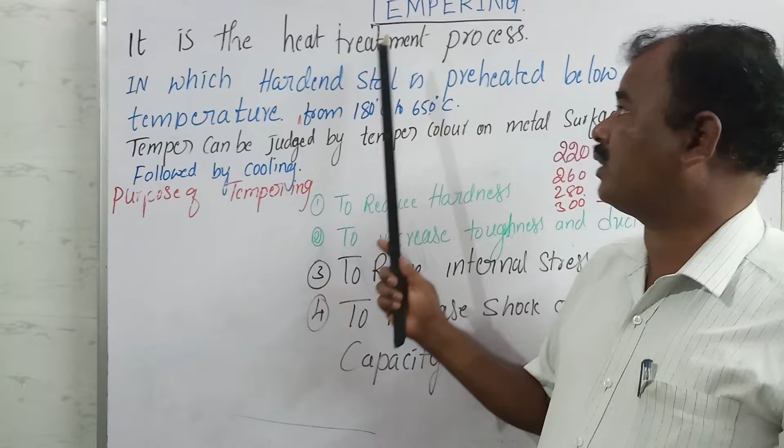Okay, next we will discuss about the third process, called tempering. We have already discussed annealing and hardening. Now the third heat treatment process is tempering. It is the heat treatment process.

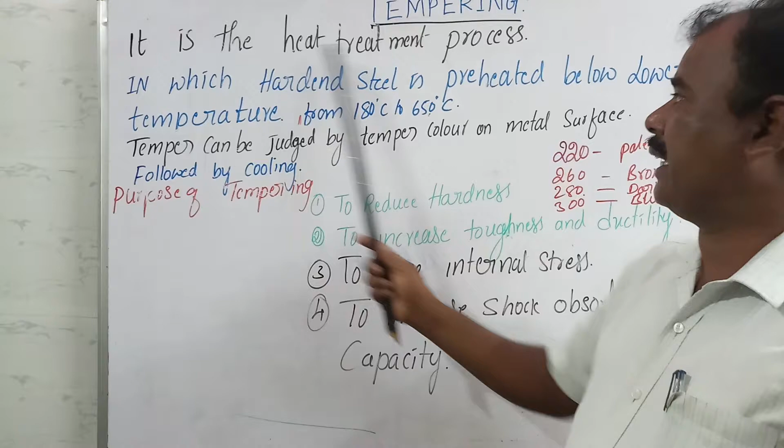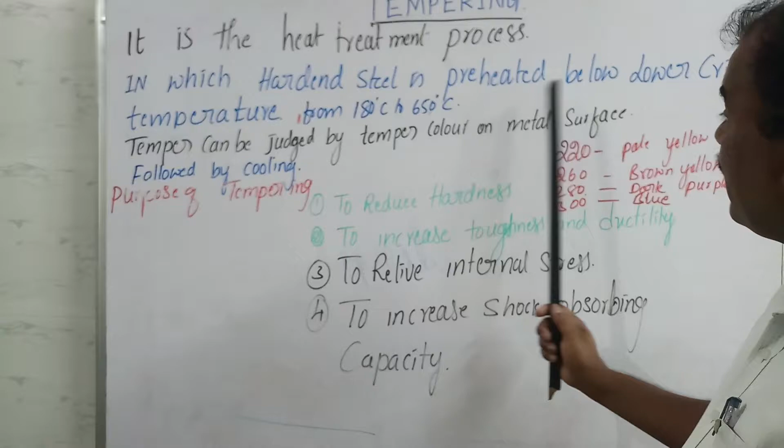What is tempering? It is the heat treatment process in which hardened steel is preheated below the lower critical temperature, from 180 to 650 degrees centigrade. This is most important. So tempering is the heat treatment process in which hardened steel, not raw steel, already hardened steel...

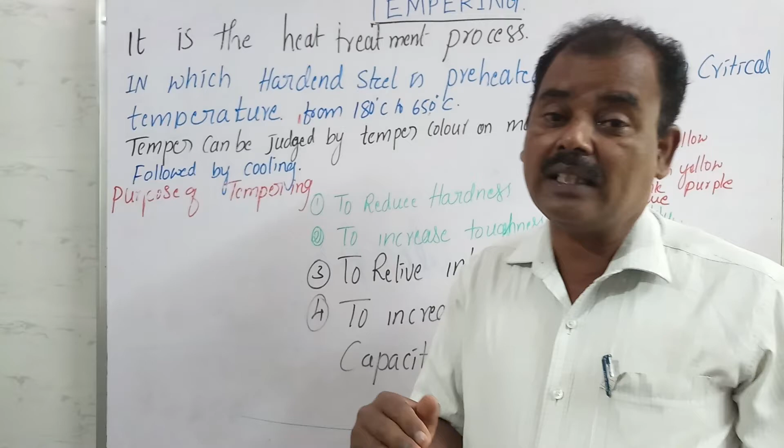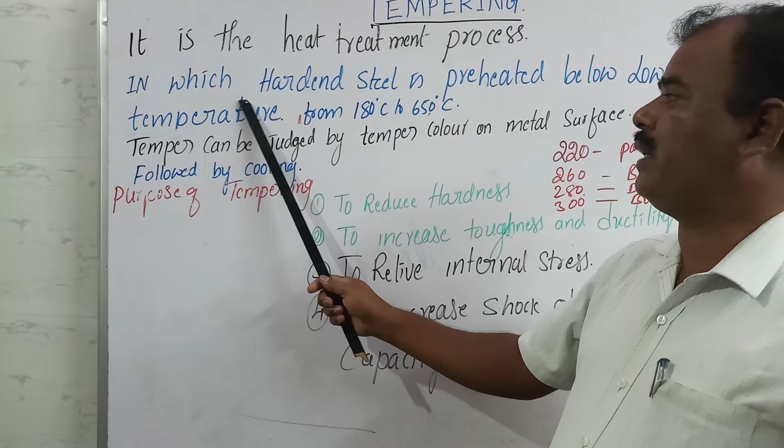It is the heat treatment process in which the hardened steel is preheated. So hardened steel is again preheated below the lower critical temperature.

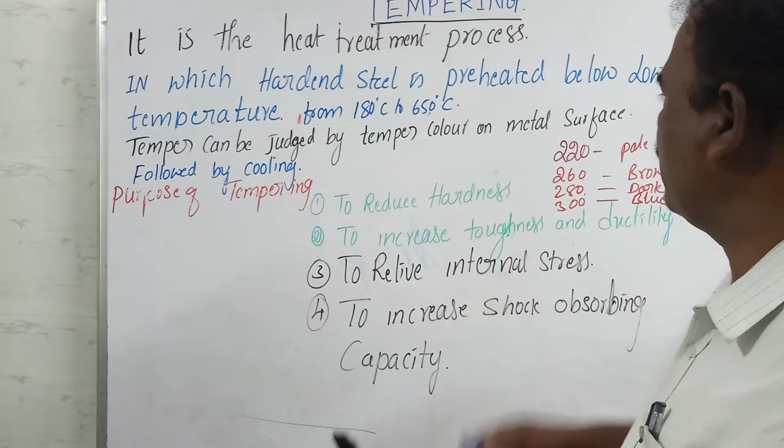What is the lower critical temperature? You already know that it is 723 degrees centigrade, the lower critical temperature of the steel.

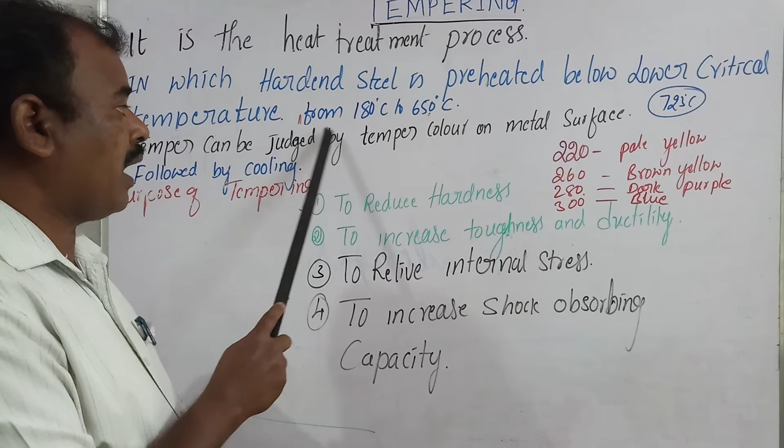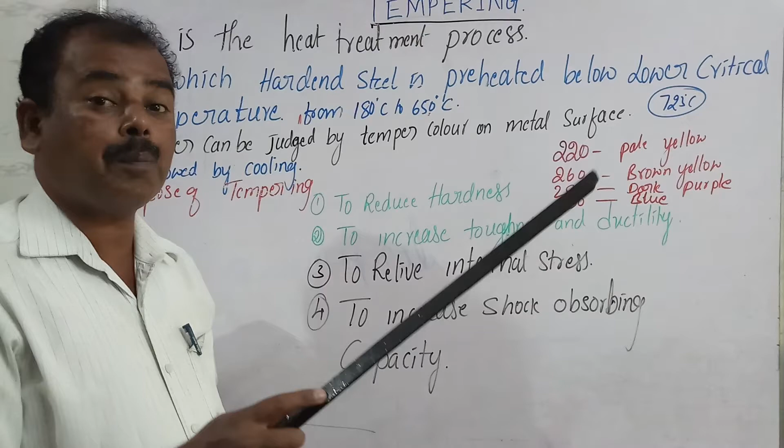The hardened steel is preheated below the lower critical temperature, from 180 to 650 degrees. Though the lower critical temperature is 723 degrees centigrade, you can heat the steel from 180 to 650 degrees centigrade depending on what property you require and the hardness of the hardened steel.

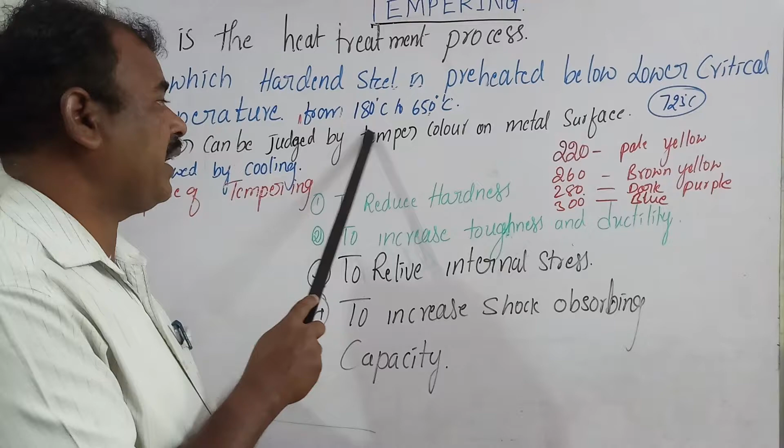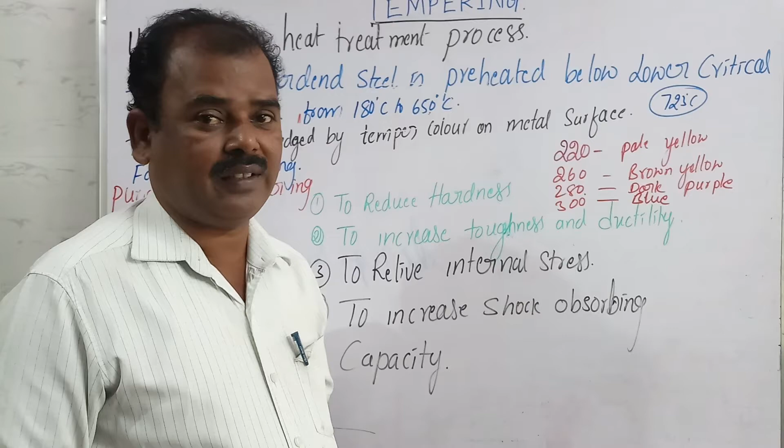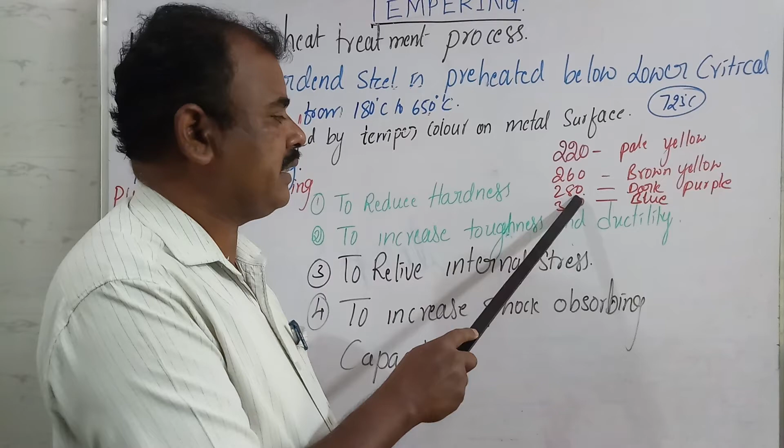For example, at 220 degrees centigrade you are heating, you get a pale yellow color on the hardened steel. At 260 degrees centigrade, that pale yellow becomes brown yellow in color. Further heating to 280 degrees centigrade, that becomes dark purple color. And at 300 degrees centigrade, you get the blue color.

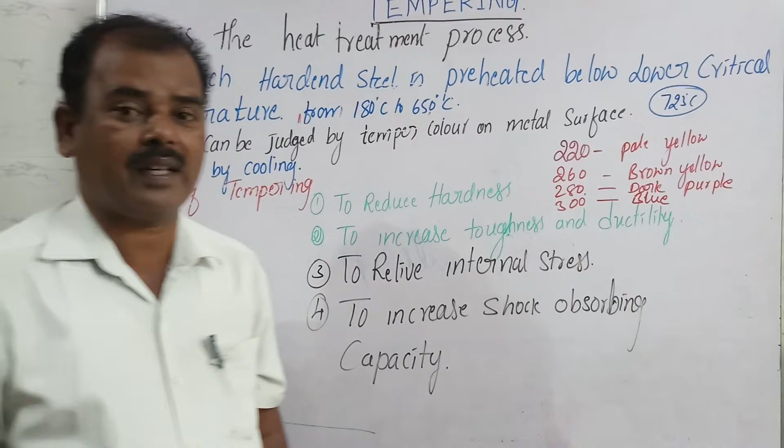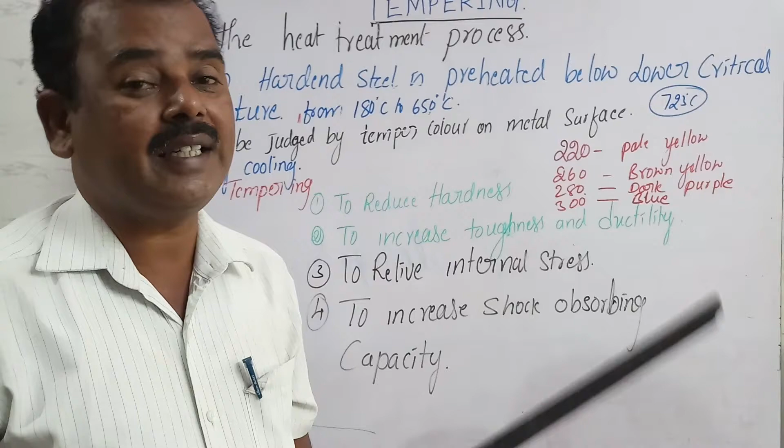So whatever temperature and color you require, you can heat the hardened steel to that temperature. So next, the temperature can be judged by temper colors on the metal surface.

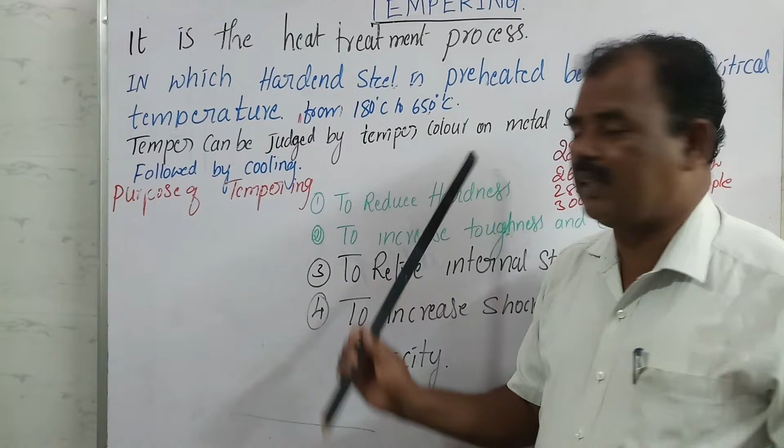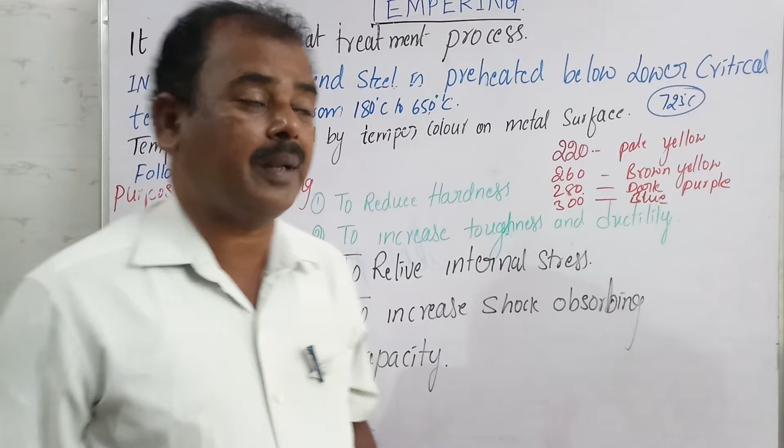Tempering is the heat treatment process in which the hardened steel is preheated below the lower critical temperature, from 180 to 650 degrees centigrade.

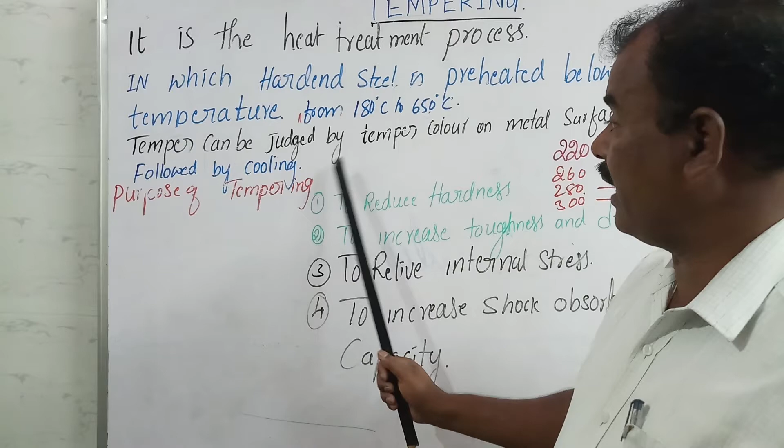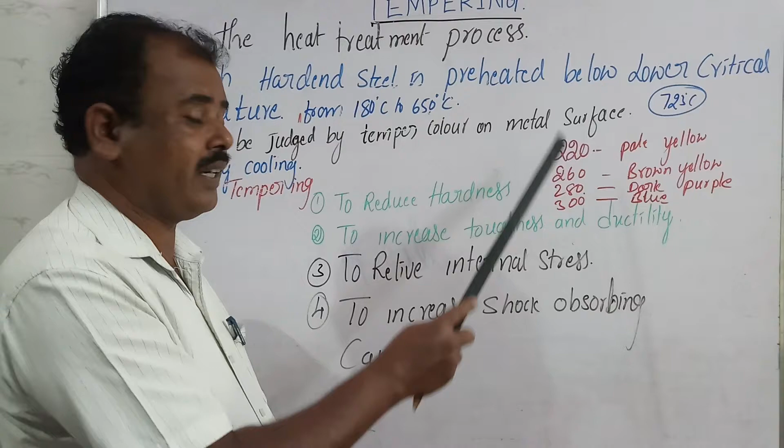The temper can be judged by temper colors, that is pale yellow, brown yellow, dark purple, blue. These are the colors you get on the surface of the metal piece, followed by cooling, then quenching that hardened steel.

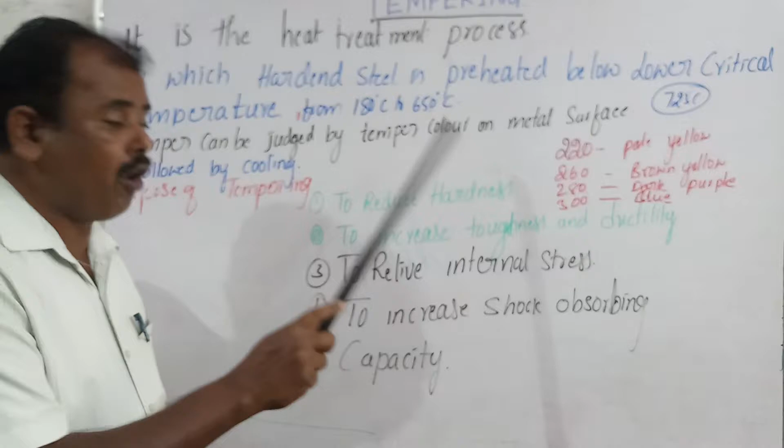Now you are getting the tempering. What is the purpose of tempering? The purpose of tempering is to reduce the hardness. If the hardness is more, you can reduce it by going for tempering, done for hardened steel only.

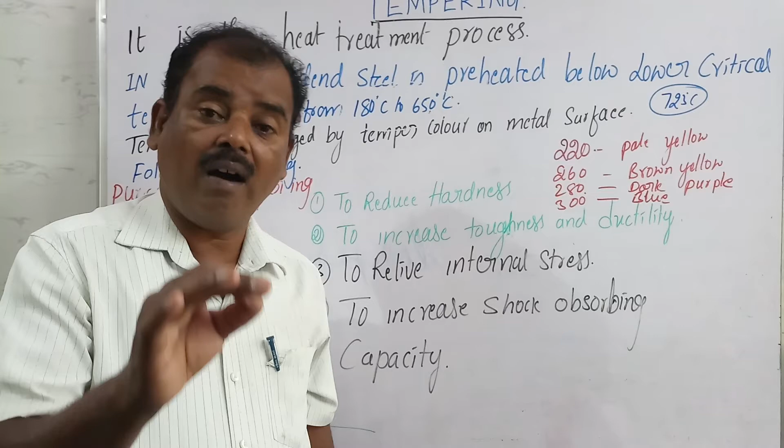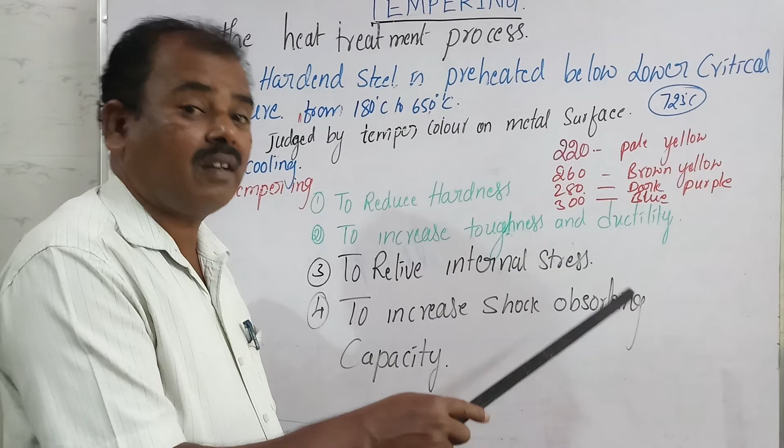Next, to increase the toughness and ductility. So when you go for tempering, automatically toughness increases and ductility increases.

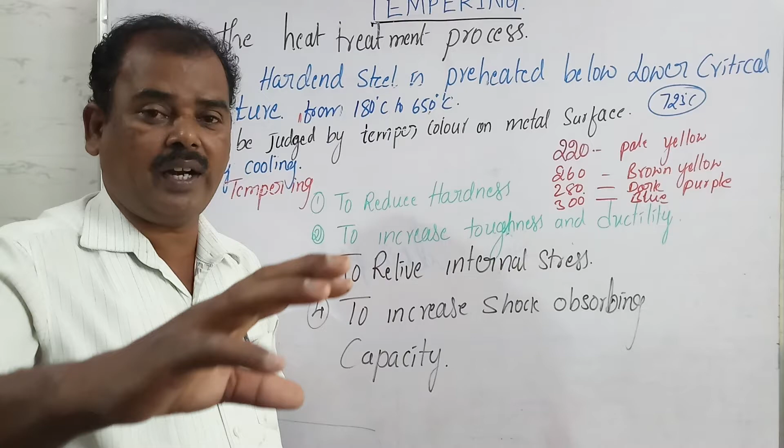To relieve the internal stresses, as you are again preheating. First you already hardened the steel, then you go for heating again. That time you relieve the internal stresses in the hardened steel.

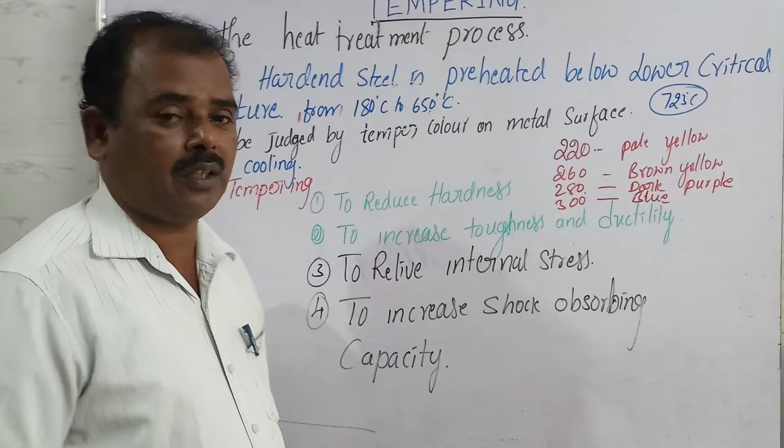To increase the shock absorbing capacity, this is most important. Because of tempering, the shock absorbing capacity increases.

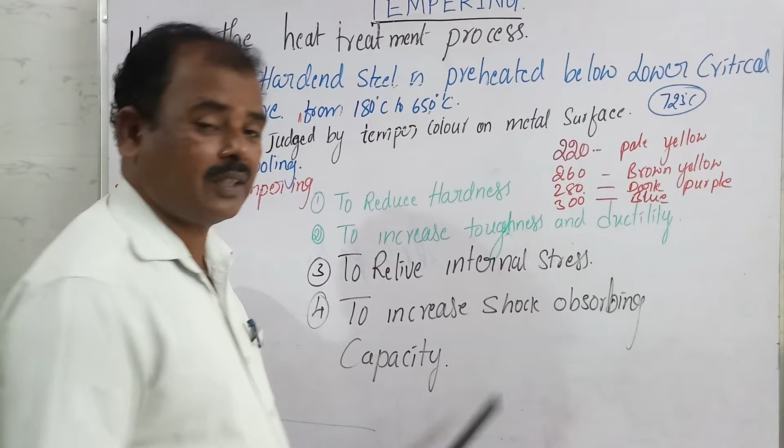So tempering is the heat treatment process in which the hardened steel is preheated below the lower critical temperature from 180 to 650 degrees centigrade.

The temper can be judged by temper colors like pale yellow, brown yellow, dark purple, blue color according to their temperature on the metal surface, followed by cooling.

To reduce the hardness, what is the purpose of tempering? You can reduce the hardness of the hardened steel.

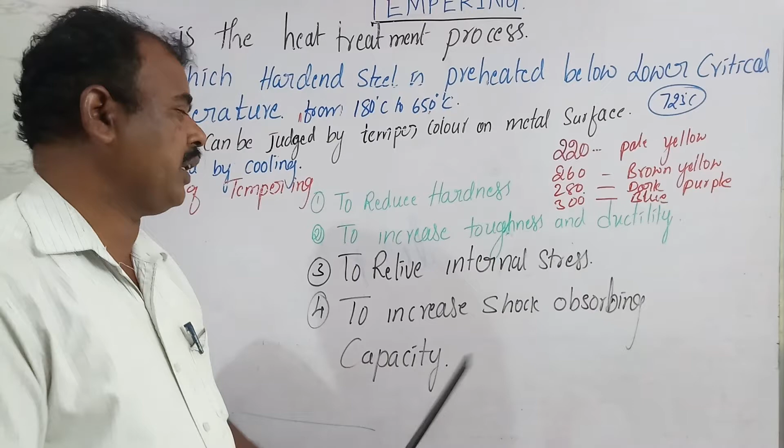You go for tempering to increase the toughness and ductility. Toughness is the property of the metal.

It is the property of the metal that it cannot break easily while applying the load.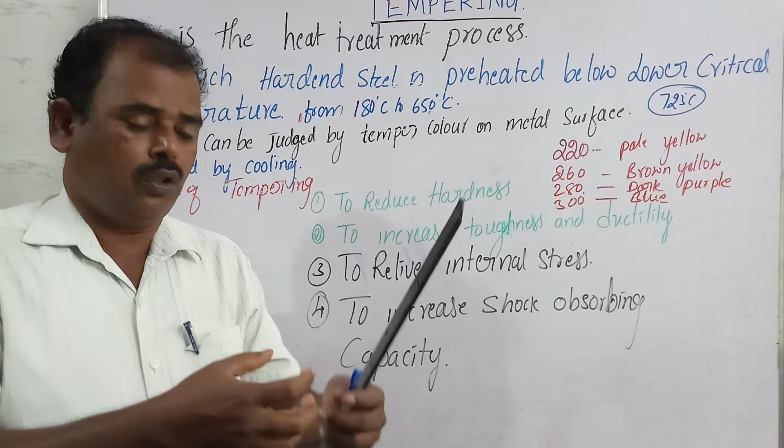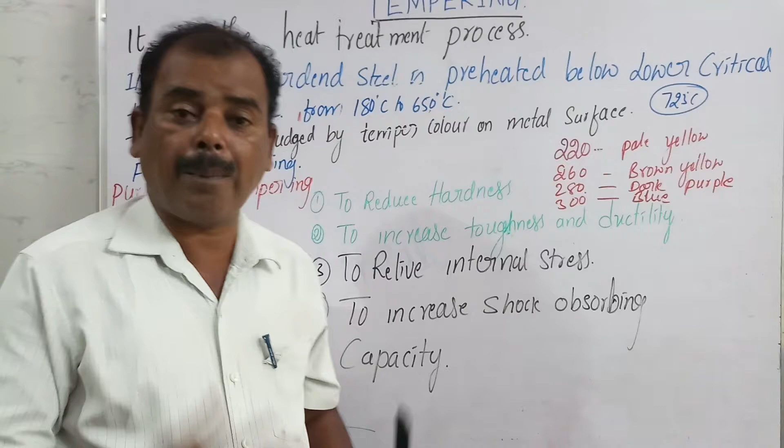And ductility is the property of the metal. It can be drawn into thin wire without breaking.

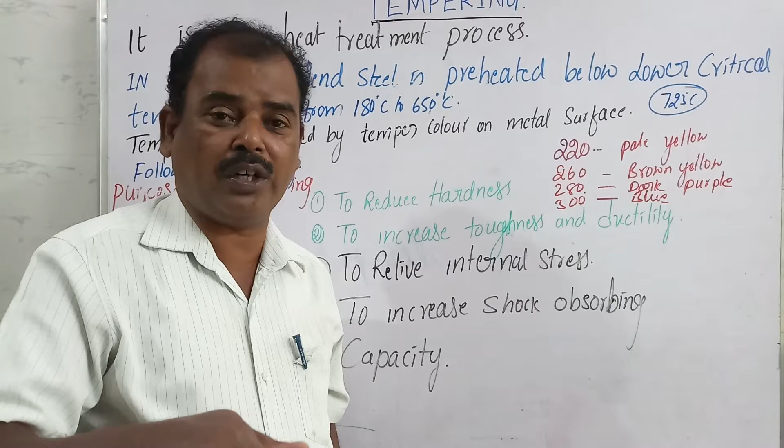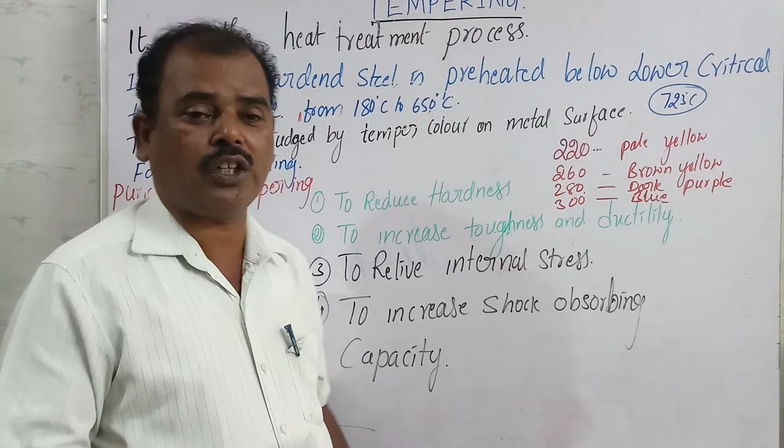So this is the most important function, to increase the shock absorbing capacity in the hardened steel.

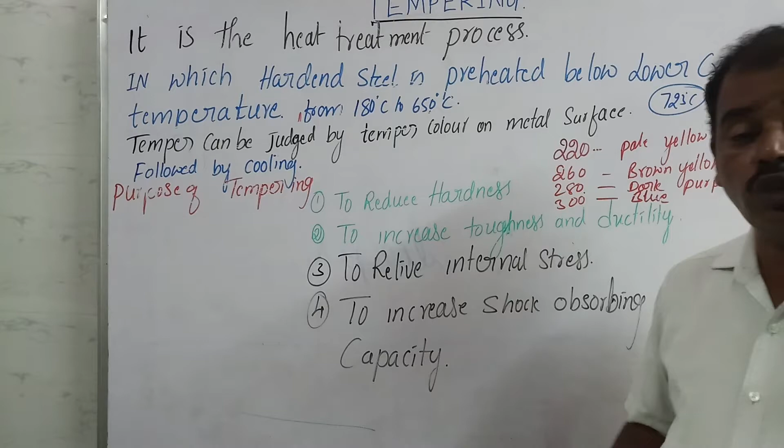Okay, this is about the tempering.

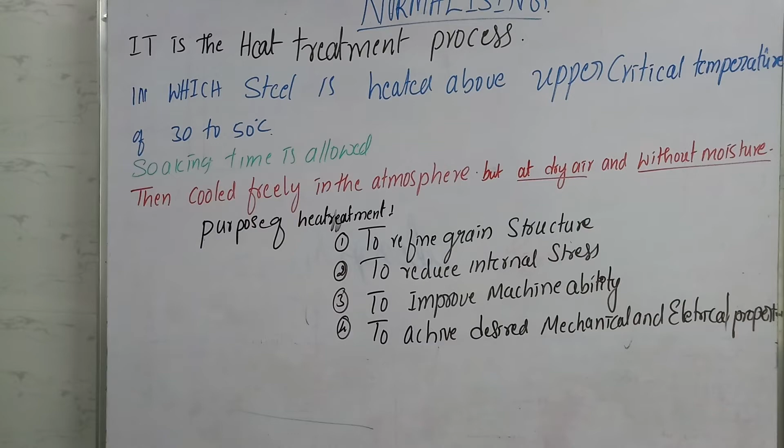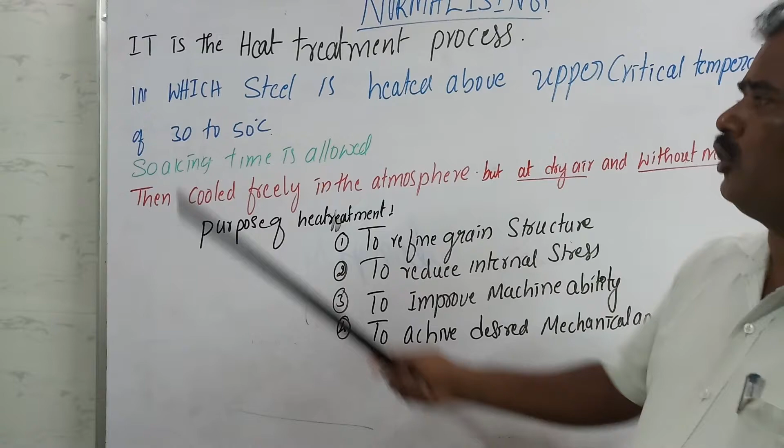Next comes the last process in the heat treatment process. The first ones are annealing, hardening and tempering. Next we go for normalizing, which is also a heat treatment process. Normalizing is the heat treatment process in which the steel is heated above the upper critical temperature by 30 to 50 degrees centigrade.

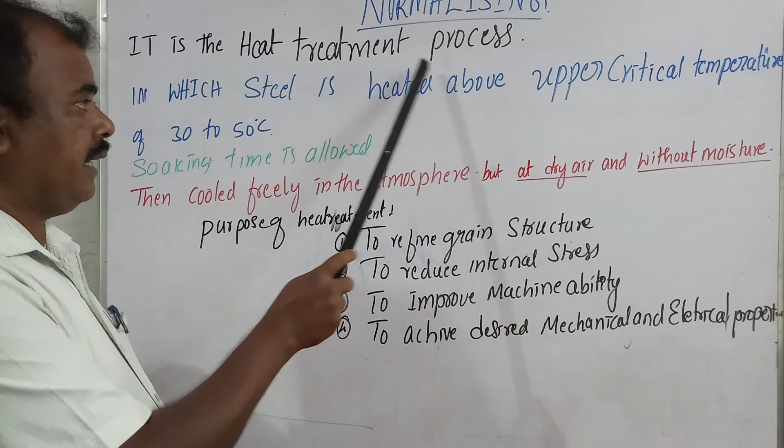The same basic definition applies to annealing, hardening and normalizing: it is the heat treatment process in which the steel is heated above the upper critical temperature by 30 to 50 degrees centigrade, as decided for that steel. You can see this in a simple graph.

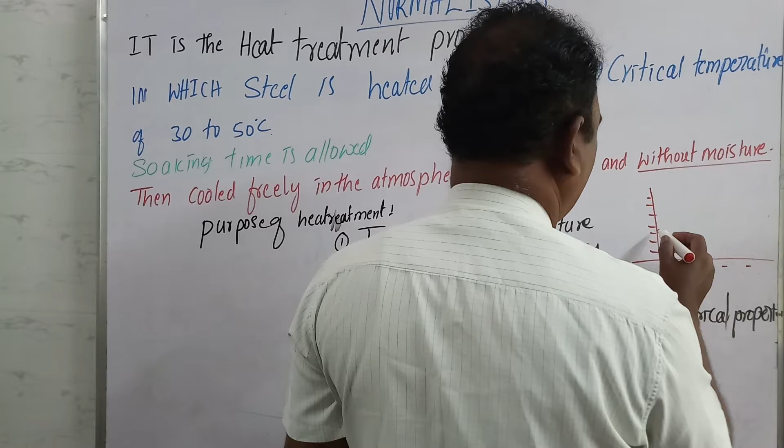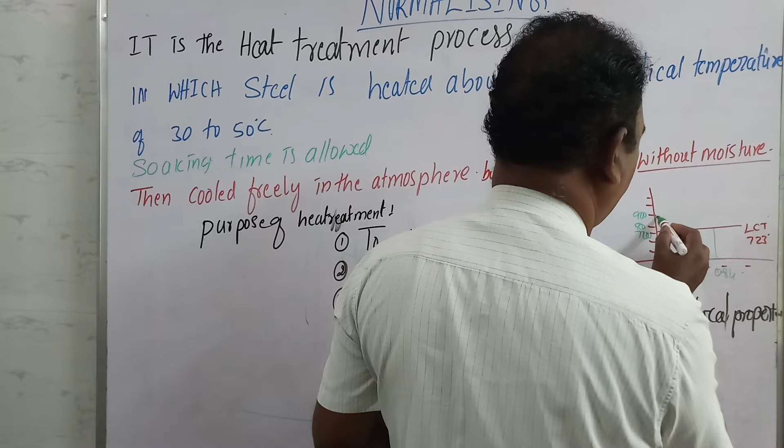This point is 0.84% carbon steel, and here is 0.4% carbon steel. This line is at 723 degrees centigrade, with 700, 800 and 900 marked. Now we decide this is the upper critical temperature.

So for normalizing, you can increase the temperature 30 to 50 degrees centigrade above the upper critical temperature.

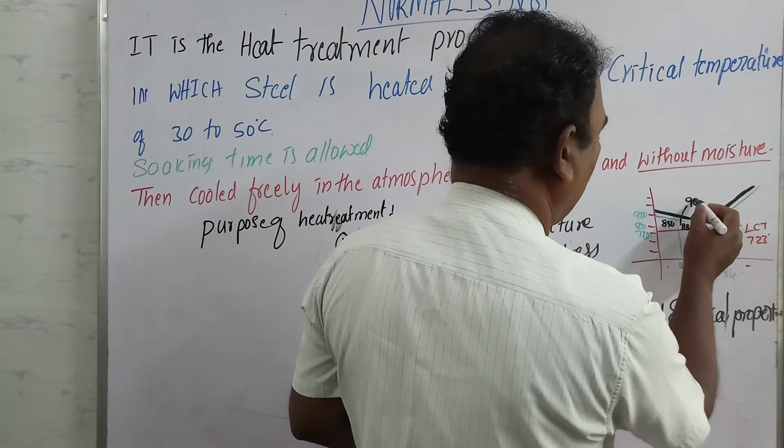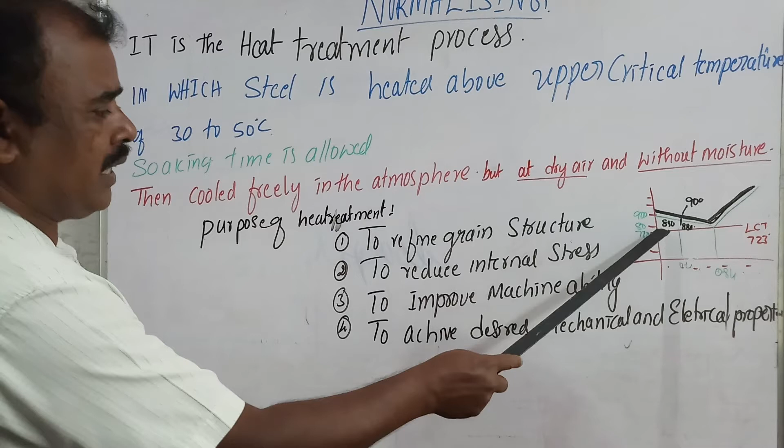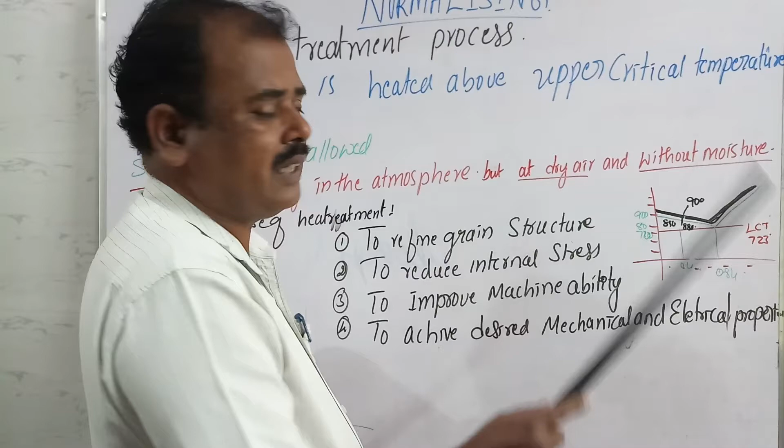See here, the steel is heated above the upper critical temperature, which is decided by the process. You heat it 30 to 50 degrees centigrade above that. If 850 is the decided upper critical temperature, you can heat the metal from 880 to 900 degrees centigrade.

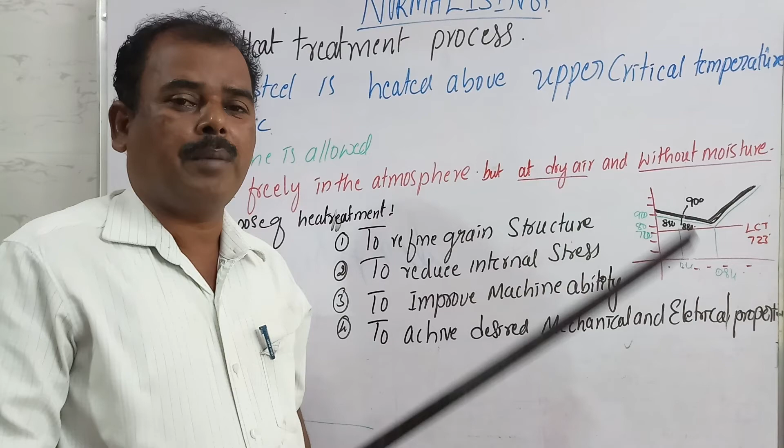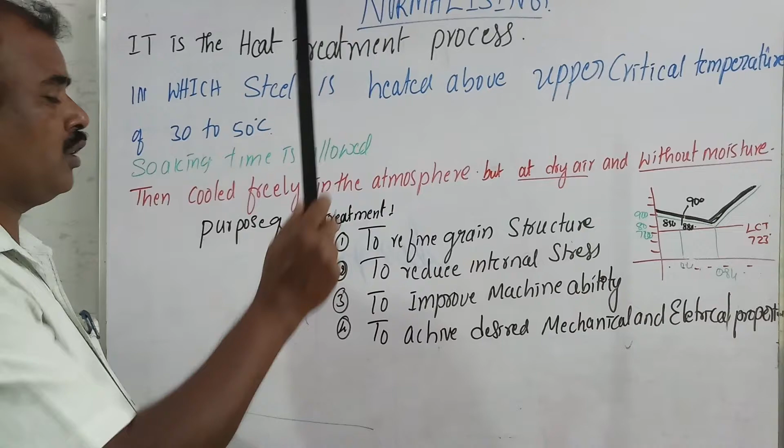Next, soaking time is allowed, so you keep the metal at that temperature for some time, maybe 5, 6, 7 or 8 minutes, as decided. This part is most important because the process is decided based on the cooling method that follows. Up to this point, annealing, hardening and normalizing are all the same, but depending upon the cooling method, the process type gets decided.

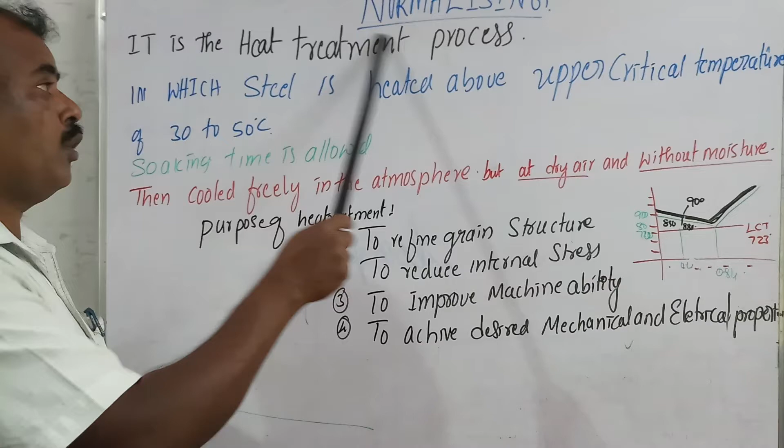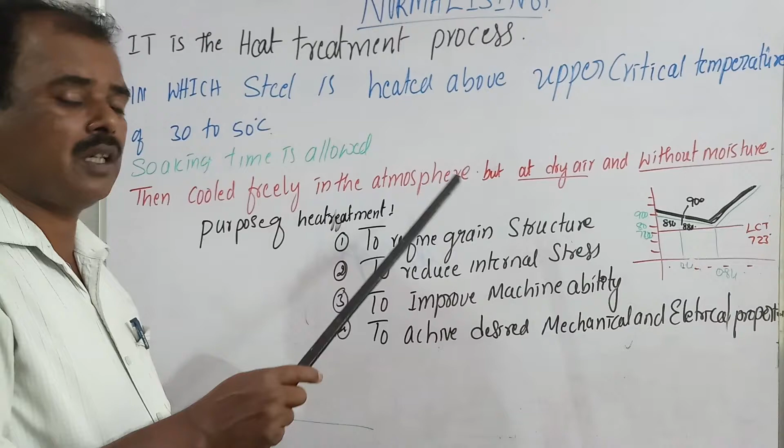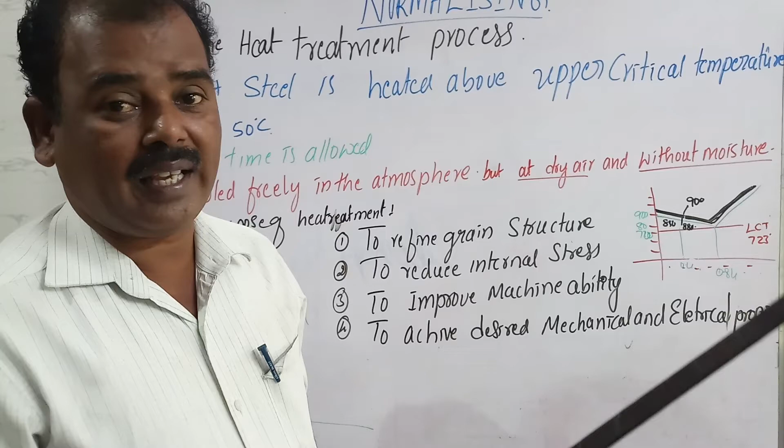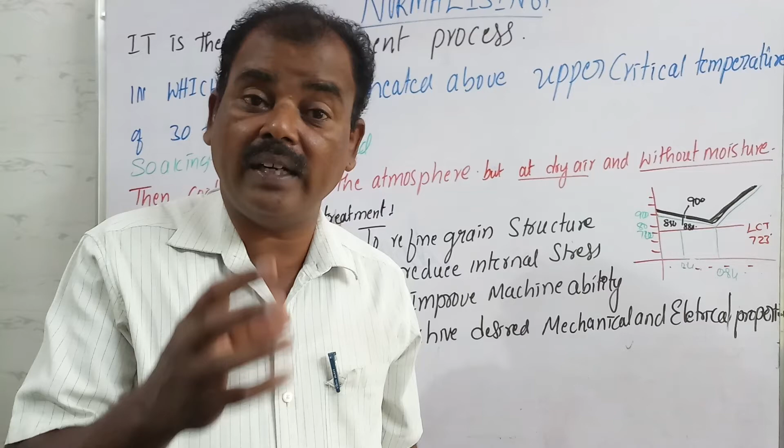For normalizing, the metal is cooled freely in the atmosphere, not inside the furnace. But that atmosphere must have dry air, not wet air. If wet air is present, corrosion reacts with oxygen and iron oxide forms. The atmosphere should also not contain moisture, otherwise corrosion will occur again. So for this, we pass hot blast air over the metal surface.

What is the purpose of this heat treatment? To refine the grain structure. This is very important.

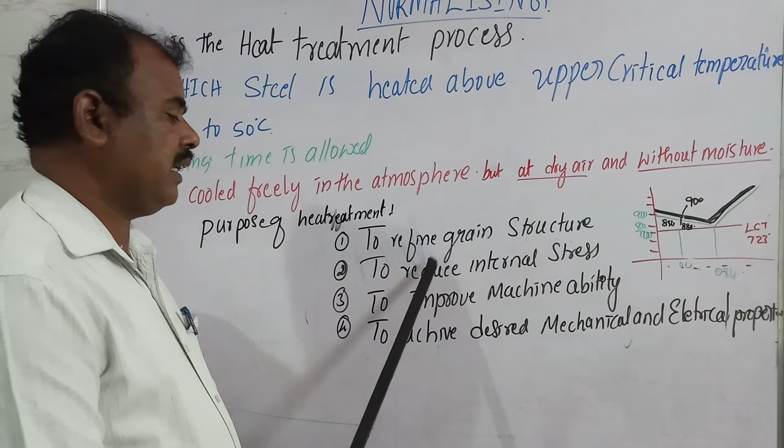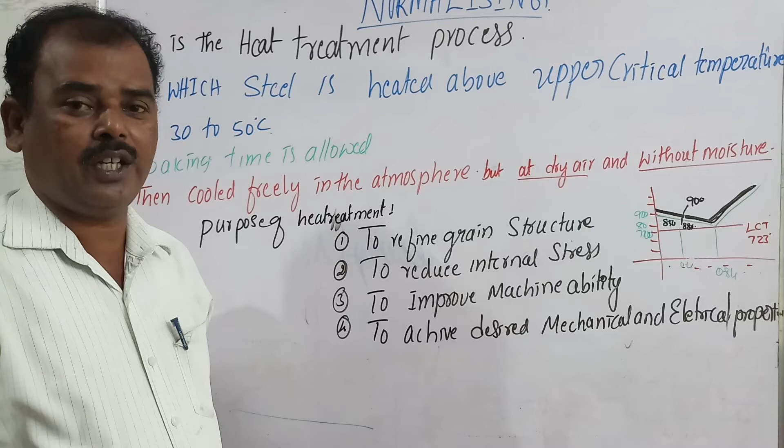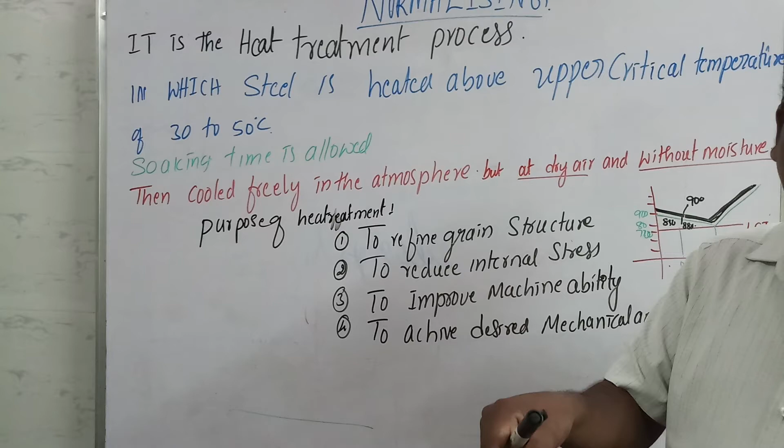Because of normalizing, you are getting the properties you require, so you achieve them by normalizing. Note that normalizing is the heat treatment process in which the steel is heated above the upper critical temperature by 30 to 50 degrees centigrade.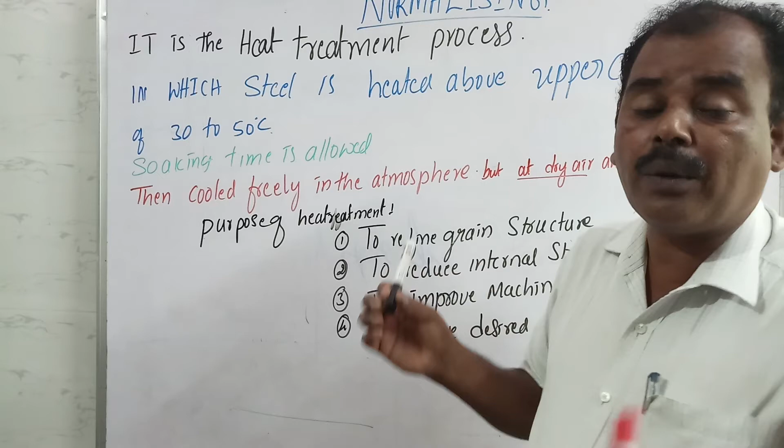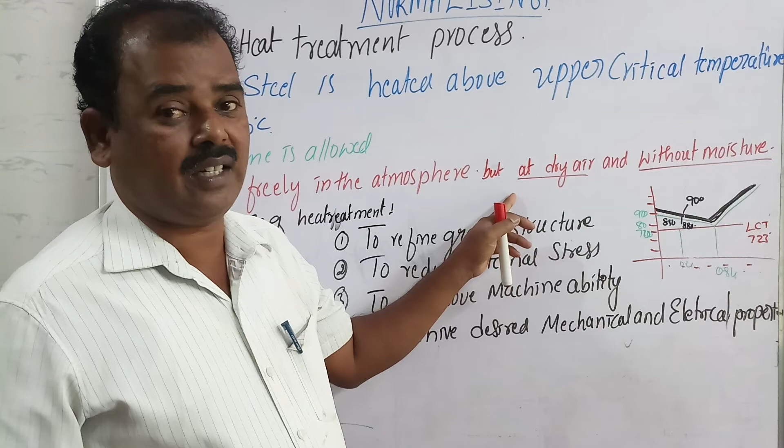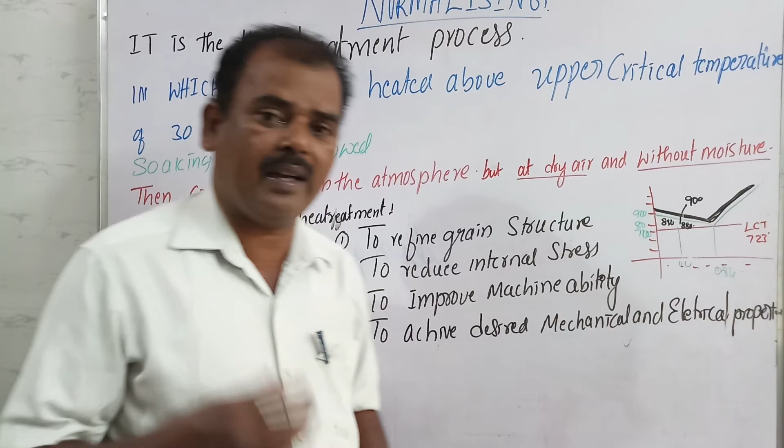Soaking time is allowed, then the steel is cooled freely in the atmosphere, with dry air and without moisture. If wet air or moisture is present, it will corrode and iron oxide will be formed.

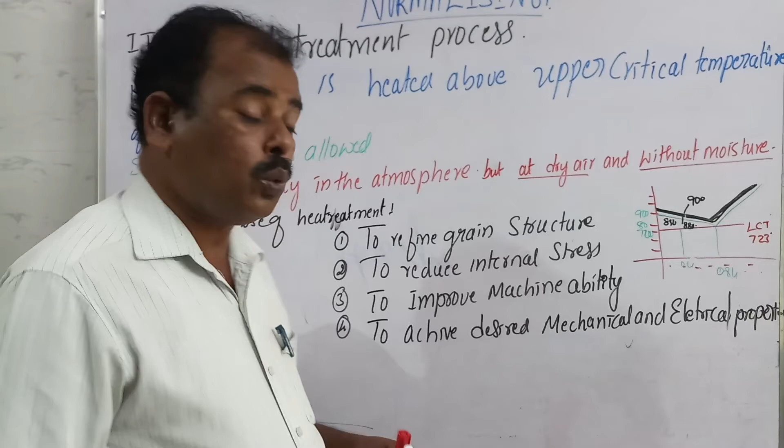What is the purpose of this heat treatment? To refine the grain structure, to relieve internal stresses, to improve machinability, and to achieve the desired electrical and mechanical properties in the steel, you go for normalizing. This is the fourth process of heat treatment.